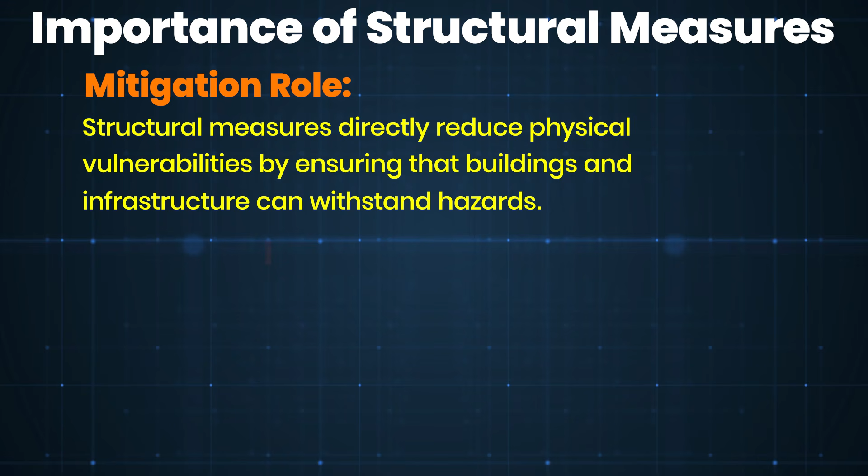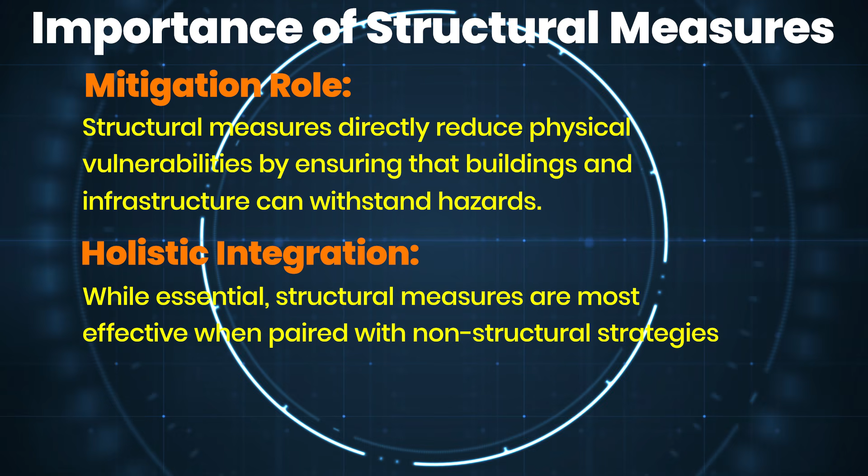There are economic benefits out of it. By minimizing damages, structural measures significantly reduce the recovery cost and economic disruptions. Studies show that investing in mitigation is often 3 to 5 times more cost effective than funding the recovery efforts. It does holistic integration with non-structural measures. While essential, structural measures are most effective when paired with non-structural strategies like policy frameworks and community preparedness.

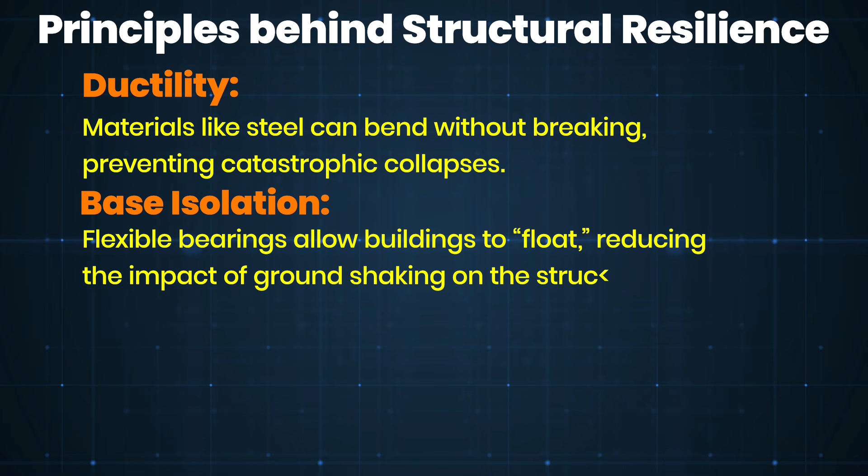Now, let us discuss a strategy for disaster risk reduction focusing on earthquake resistant buildings. These structures aim to reduce loss of life and minimize damage during seismic events. Buildings are designed to absorb and redirect seismic energy, ensuring stability even during strong earthquakes. The principle behind structural resilience, number 1, is ductility. Under ductility, materials like steel can bend without breaking, preventing catastrophic collapses. Second is base isolation. Flexible bearings allow buildings to float, reducing the impact of ground shaking on the structure. The third one is energy dissipation devices. Technologies such as dampers convert seismic energy into heat or opposing movements, stabilizing the structures.

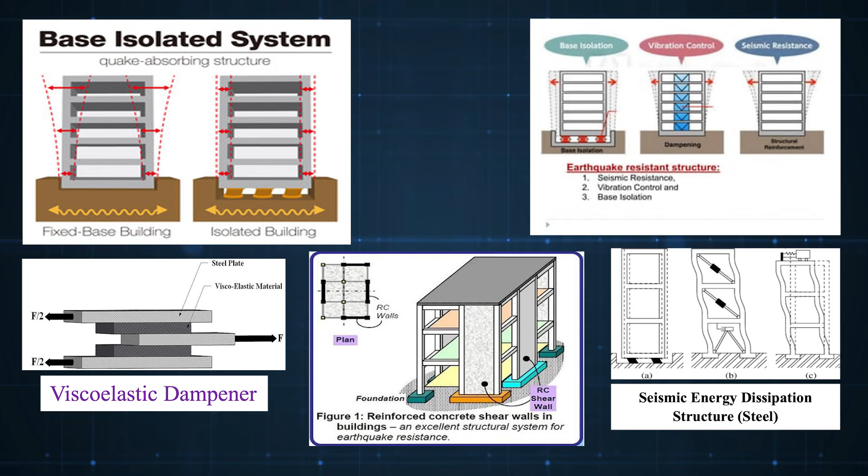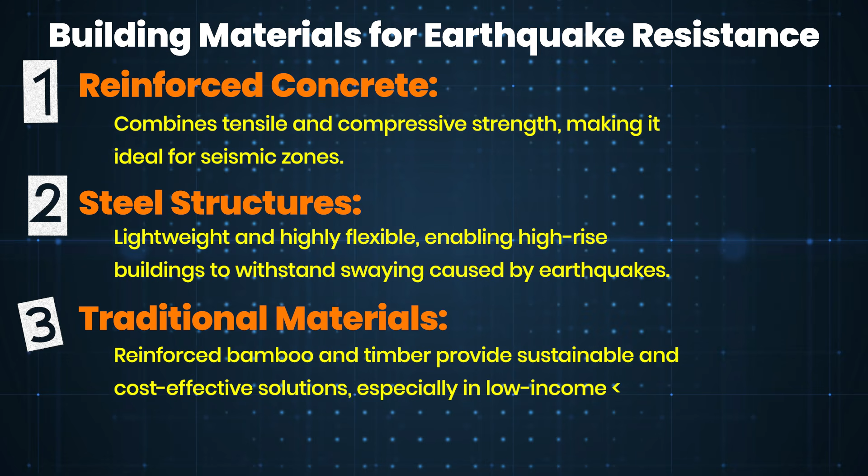There are certain building materials used for ensuring earthquake resilience. Number 1 is reinforced concrete. It combines tensile and compressive strength, making it ideal for seismic zones. Number 2 is steel structures, lightweight and highly flexible, enabling high rise buildings to withstand sway caused by earthquakes. And certain traditional materials like reinforced bamboo and timber provide sustainable and cost effective solutions, especially in low-income regions. For example, bamboo reinforced homes in rural South Asia have demonstrated remarkable earthquake resilience.

Now, let us come to retrofitting existing buildings to make them earthquake proof. The purpose is to strengthen older structures to meet current seismic standards and reduce their vulnerability. Examples are retrofitting schools, hospitals and historical landmarks in urban areas, which creates resilience. There are certain techniques used for this. Number 1 is shear walls and braces; they enhance lateral stability. Number 2 is column jacketing to strengthen critical load bearing components, and number 3 is base isolation retrofits to reduce shaking impacts during earthquakes.

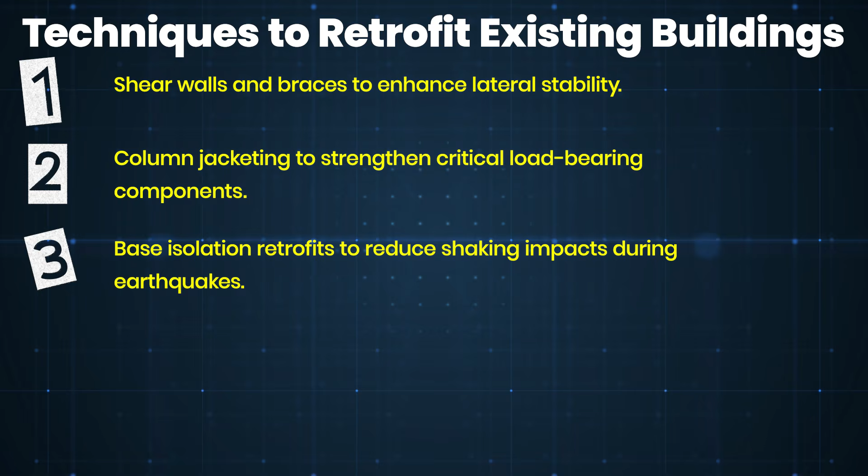Now, from earthquakes we are moving to flood control infrastructure for risk reduction. These are physical structures designed to manage and prevent excess water flow during floods. They protect communities, infrastructure and ecosystems from flood related damages. For example, the Thames Barrier safeguards London against tidal surges and river flooding. It ensures uninterrupted operation of critical services including hospitals, power plants and others during flooding events.

Now, let us try to understand types of flood control structures. Number 1 is dams and reservoirs, which store large amounts of water. They regulate river flows and store excess water to prevent seasonal flooding. For example, Hirakud Dam in India controls floods while supporting agricultural irrigation. Others are levees and embankments. They act as barriers made of earth or concrete to contain rising water levels. They have certain limitations: risks of overtopping during extreme flood events.

The third category of resilience is coastal flood control structures. One is sea walls, a solid barrier to shield coastal areas from storm surges and erosion. The Mumbai sea wall mitigates the impact of monsoon tides. Breakwaters are structures that absorb wave energy and reduce flooding risk, and there is natural resilience created through mangroves and ecosystems. Natural solutions like mangrove forests provide a buffer against storm surges while supporting biodiversity. For a case study, you can refer to Bangladesh, where mangrove restoration programs have proven effective in reducing cyclone impacts.